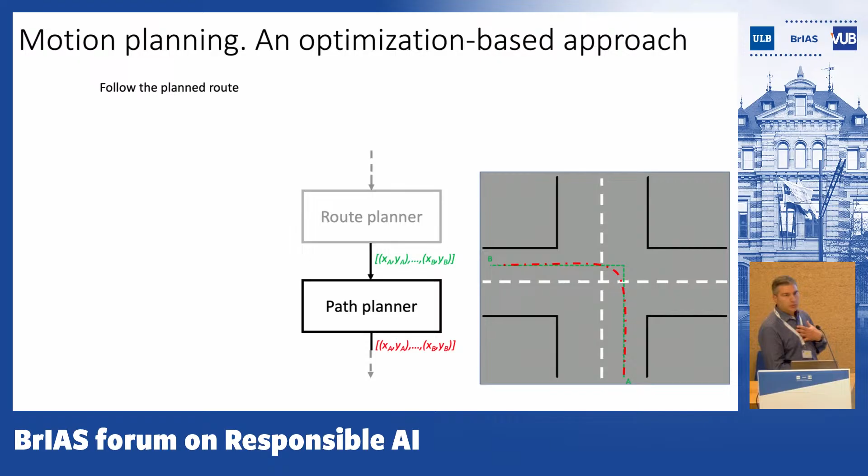That's why you, as a driver, while following the green line, actually plan in advance something like the red line, which is our path. You extract some points from the red line which you try to follow, that account also for what your vehicle is. If your vehicle is a bike, probably you will follow the green line. But if your vehicle is a bus, that would be a tough job. That's why in an autonomous driving stack, you have a module called the Path Planner, that does exactly the job we do every day while driving our vehicles.

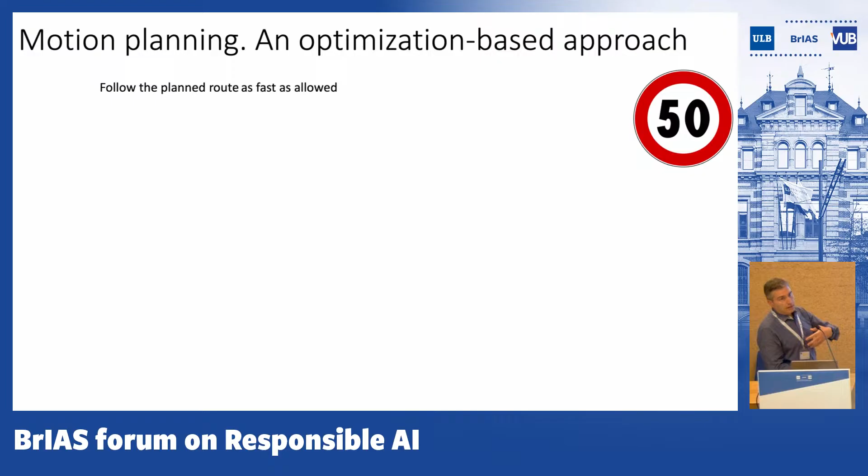Clearly, we as a driver plan our path subject to a number of rules or constraints. We plan a path and follow it subject to vehicle speed, so speed limitation, like the one that you see over here. Clearly, you don't plan anything which your car cannot do. As a driver, we also plan our path subject to what the limitations of the vehicle are.

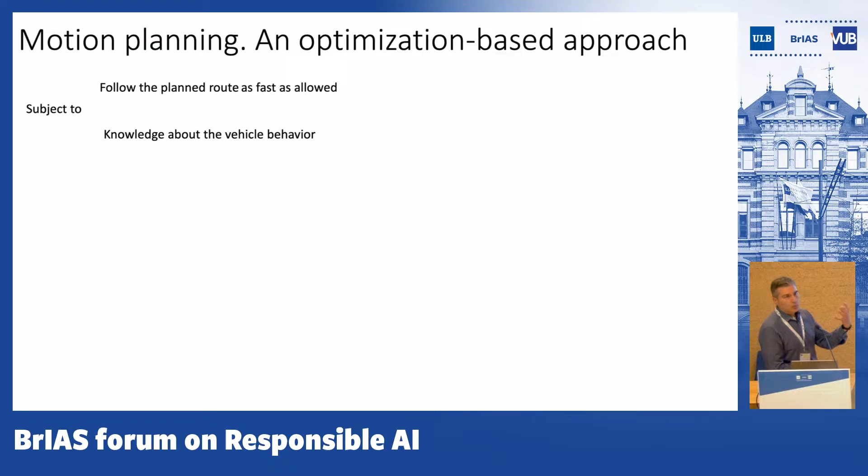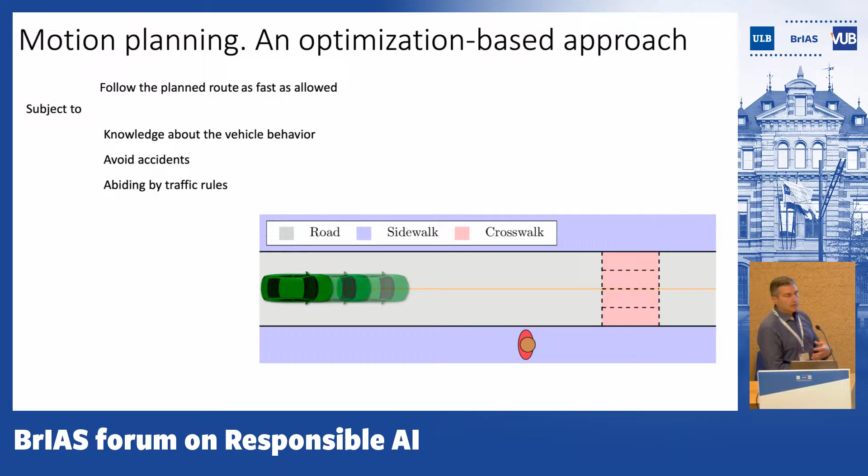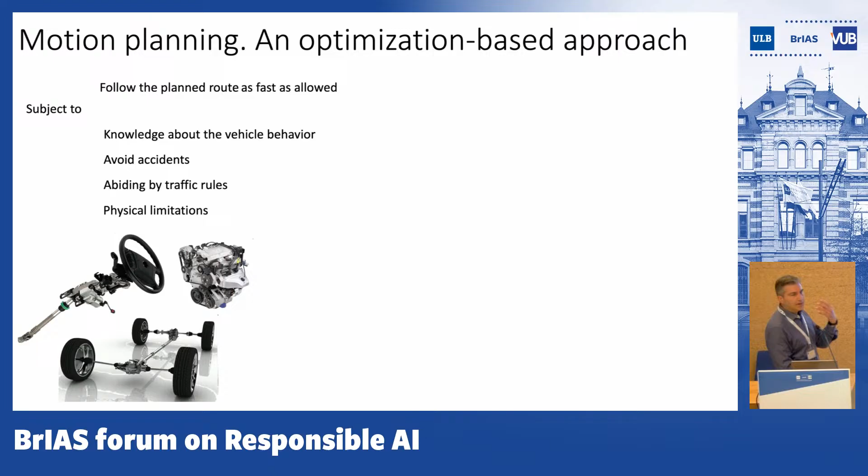Clearly, you want to avoid accidents. So while planning the path of your vehicle, if you see a pedestrian or a static obstacle, you will make sure that you avoid any collision with obstacles. Furthermore, you have limitations coming from the vehicle. Here we have a steering actuator, which is basically an electric motor, and you can't steer as fast as you want. So while planning your path, you should also account for limitations imposed by the physics of your vehicle. The same holds true for engine, braking, or whatever your actuators could be in the vehicle.

So to solve this path planning problem as I just stated it, in our community we resort to a technique called model predictive control. The path, the sequence of points which we plan to follow, are the results of an optimization problem. In this optimization problem, what we try to do is optimize the future behavior of the vehicle with respect to a future sequence of control inputs: steering commands, acceleration commands, braking commands, and so on.

So what we do is have a plan, a trajectory from the current time up to a future time instance. We just use the first portion of this plan and throw away the rest. We wait some time, collect new measurements about the environment and the state of the vehicle, its velocity, its position, and then we redo the same job over and over again.

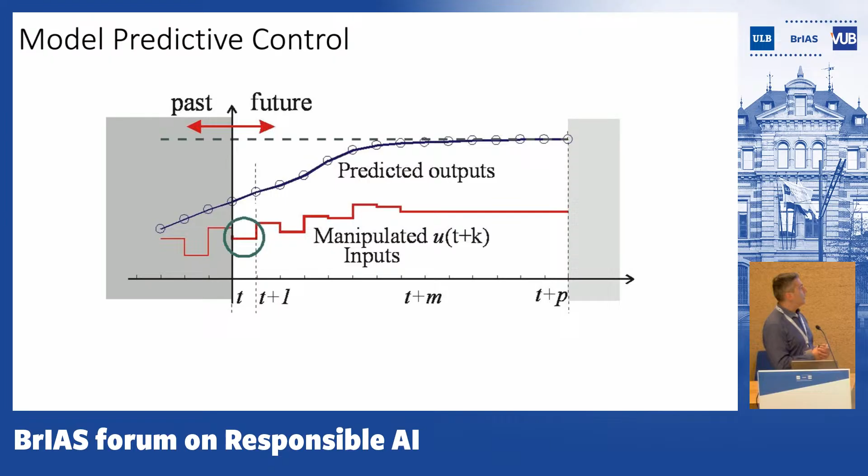This technique is called receding horizon or model predictive control. It's the same scheme, just two different terminologies for it. So let's try to write in math what we have just said.

What we are going to do is try to minimize, at every time instant, a cost function. Such a cost could express the willingness of having a red line as close as possible to the green line, right? So please find a path which follows the desired route, such that I can go from origin to destination.

But our path must also be subject to the limitation of our vehicle. We should account for whether our vehicle is a bicycle, a car, a motorcycle, or a truck, and constrain the generation of our path to the limitations of the vehicle: steering limitation, steering rate limitation, and so on.

And here comes a painful ingredient in this recipe: a number of constraints that model collision avoidance against surrounding objects—other vehicles, pedestrians, bicycles, trash bins, parked cars, everything we would like to avoid a collision with. These are additional constraints I'll come back to later in the presentation.

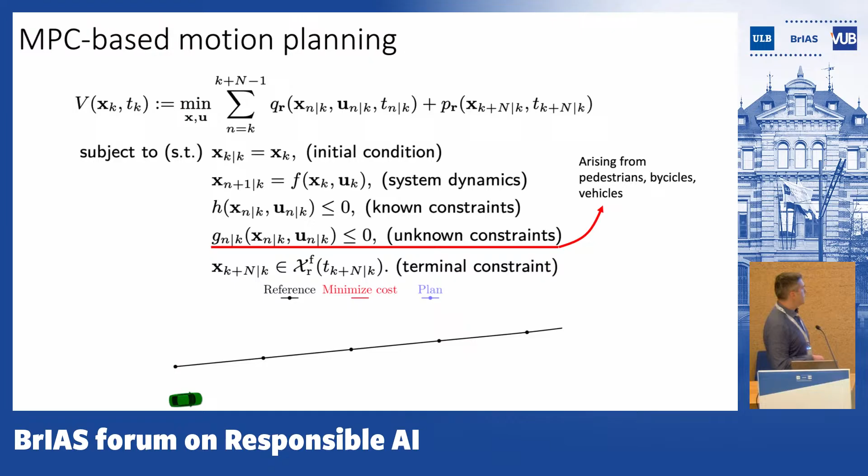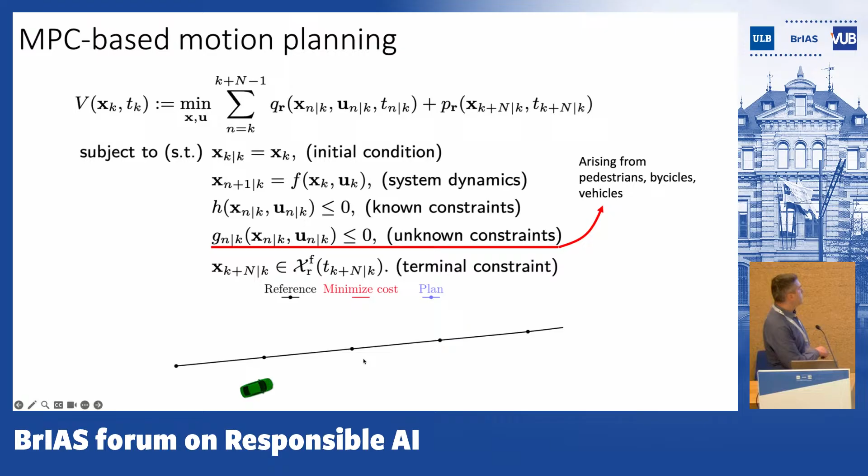The way these algorithms work is that the vehicle, at the current time instant, plans the path such that it will progressively approach this path, the green path we had before. This is the future path that is planned to be followed. But at the next time instant, we redo the same job over and over again.

So it looks like a scheme that perfectly fits the path planning problem we have just stated. But there are several issues to be accounted for. First of all, this is an optimization problem that we need to solve in real time.

What does that mean? It means that every 50, 20 milliseconds, we need to pack such a problem, give it to a software optimization solver, and hopefully get the solution in time, before the 50 milliseconds. But there are a few more issues.

One is stability issues—how to make sure that the path we get nicely and smoothly approaches the planned route. We don't want something that is oscillating or eventually deviating indefinitely from the planned route. That's called stability issues.

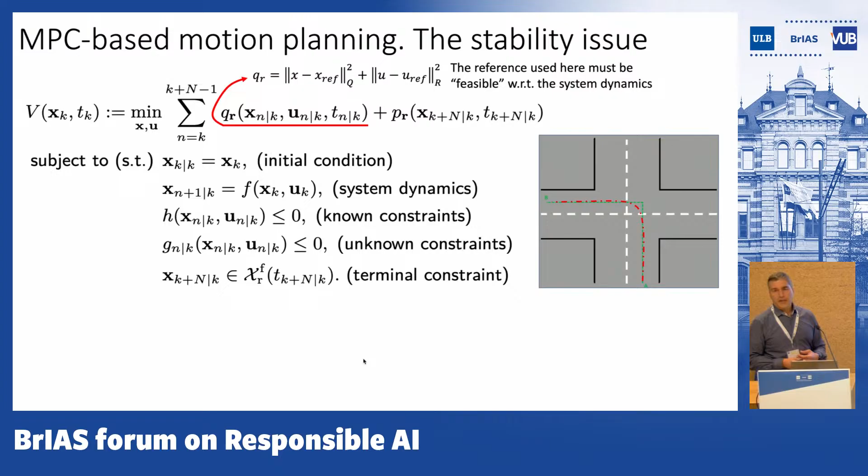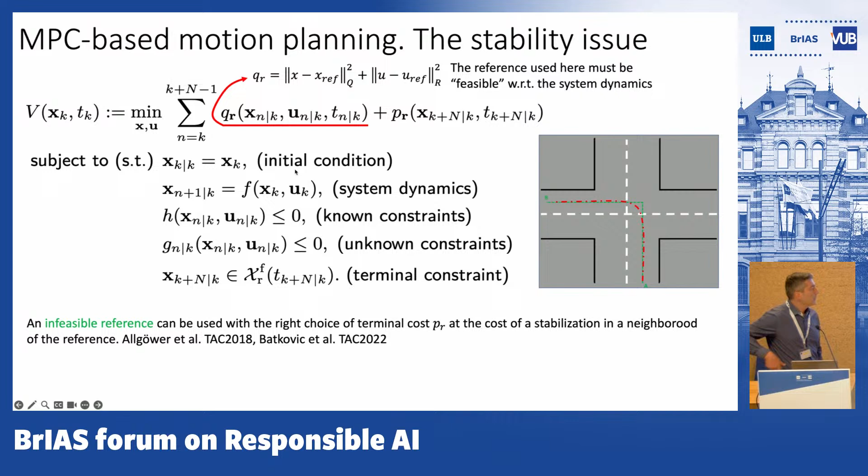There are results which guarantee that you can eventually stabilize around the green line, requiring that you generate this green line such that it satisfies the system dynamics. That's a strong requirement. More recent results from us, and some a bit earlier, allow you to feed in a green line that doesn't satisfy these constraints and still have a stability guarantee. But what we focus on mostly in our work is feasibility issues.

What is the feasibility issue? What we want to make sure of is that we never plan a path such that a crash or accident becomes unavoidable in the future. We want to make sure we always plan a path such that we can still do something in case, for instance, vehicles pop up or pedestrians suddenly cross the road, at least to some extent.

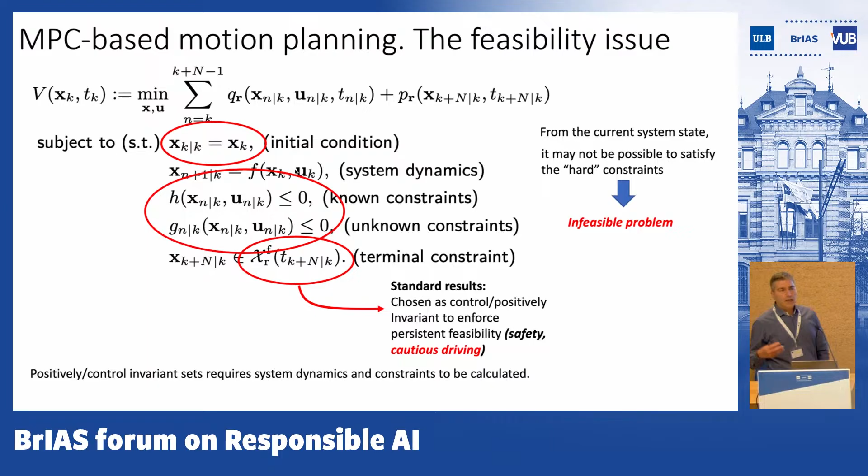There are results which allow you to ensure this, and in particular you can design terminal constraints—constraining the state at the end of the horizon, the position and velocity of the vehicle at the end of the horizon. For instance, if you're planning to approach a wall, you may impose that the velocity at that position is zero, so you avoid smashing into the wall.

That's just an example. What's the problem with these standard results found in the literature? Well, to calculate such a set, you need to know the system dynamics—this function f—no problem.

Most of the time you have it, and it's fairly accurate - a mathematical model of the vehicle. You also need to know this set of constraints, no problem. Most of the time you know what the braking and steering limitations are, fairly accurately. But what you don't know is this constraint.

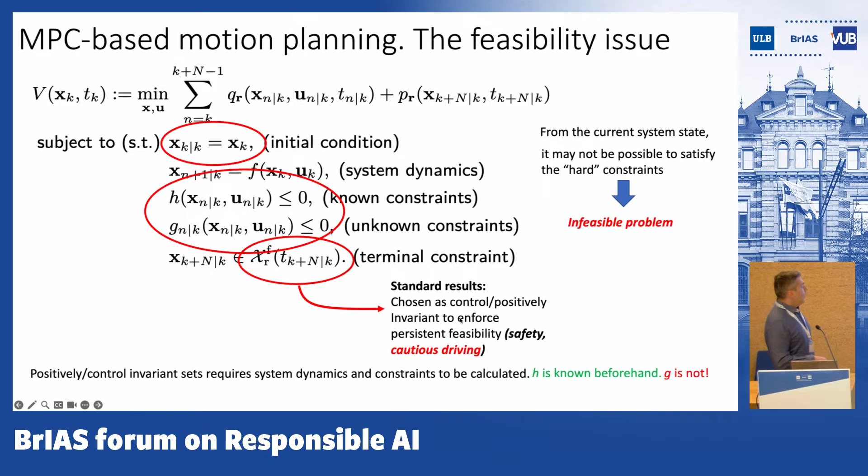These constraints model collision avoidance against obstacles that, when you code your controller, are not there. Nobody is going to tell you that in 50 meters you will have a pedestrian crossing the walk. So that's the problem with these standard results in control theory, and that's what we have been contributing to.

An example of how these unknown collision avoidance constraints could be modeled is given now. You can mathematically model the motion of the vehicle with this set of equations without going into the details. This model describes the evolution of the lateral deviation from a path, for instance from the green path you've seen before, and the orientation error with respect to this path.

Here we can model the steering dynamics using a variable, the steering angle, how much we are turning the wheel at the road - these are the actuator dynamics. This is the longitudinal vehicle velocity, how fast we are going, and this is the vehicle acceleration. Over here we have the commands to the vehicle, the gas pedal and the steering angle. That's it.

Why am I showing this mathematical model? Because standard constraints on the vehicle motion are imposed by constraining these state variables and input variables. For instance, here I may want to constrain the lateral deviation of the vehicle from the green line.

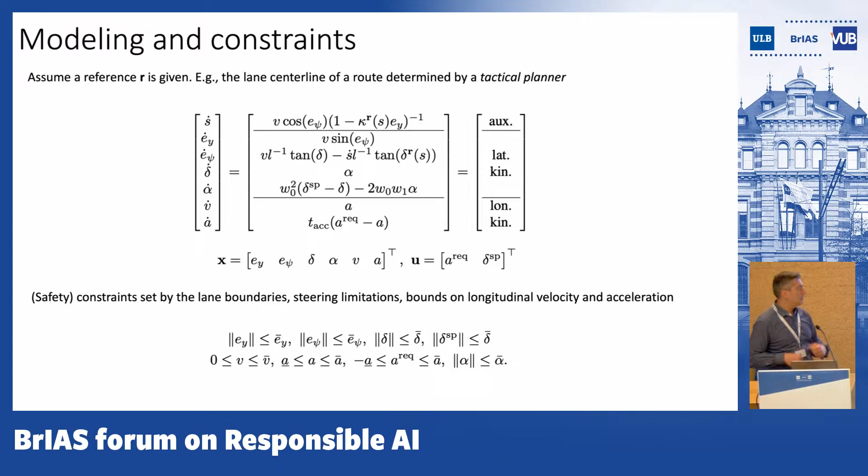Why? Because on the right side it could be a sidewalk with a cycling path, and on the left it could be the other lane. So I don't want to have an accident - stay in the lane, that's basically what this means. I also have other constraints reflecting limitations from the steering actuators, the engine, and the braking capability, and so on.

Let's talk about these collision avoidance constraints, how we can build such a mathematical function, such an inequality. This over here is just an example - you can do it in many ways. This is only one of the different possible ways you can write this inequality.

This could be a collision avoidance constraint saying, for instance, make sure that the minimum distance - here it's written as a maximization, but it could be the minimum distance from a pedestrian is larger than something. This means don't get closer to an obstacle than, say, 3 meters or whatever.

So this function is clearly a function of the vehicle state and input - function of the vehicle position and velocity - but it's also a function of some additional variable that describes where the obstacle is. This W, for instance, could be the relative position of the pedestrian or the other car with respect to the vehicle. And clearly it's uncertain.

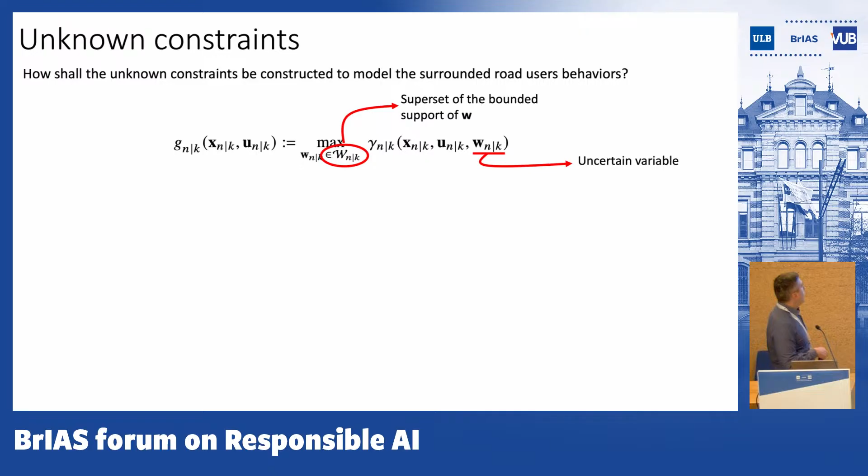It's difficult to model what a human will do, whether it's a driver or a pedestrian. So the approach we have followed is to model the motion of the obstacle we want to avoid as a dynamical system driven by a bounded noise. In the most general setting, you may also want to model the interaction of the pedestrian with the vehicle, which is why we also include the vehicle states and control inputs here.

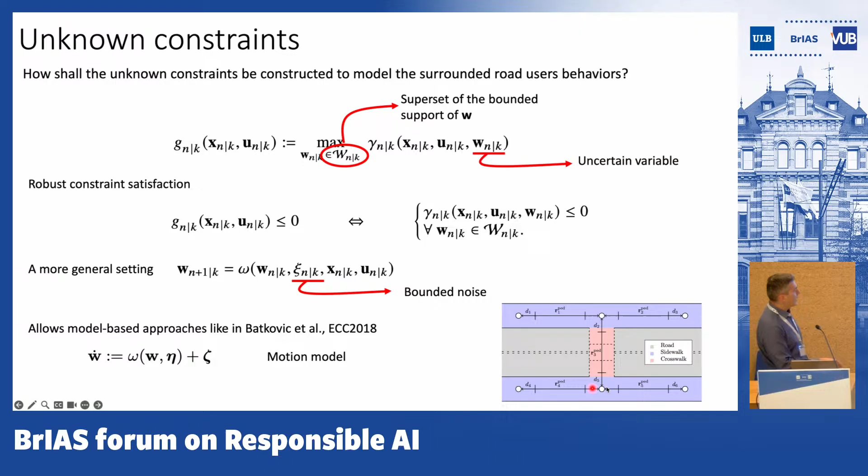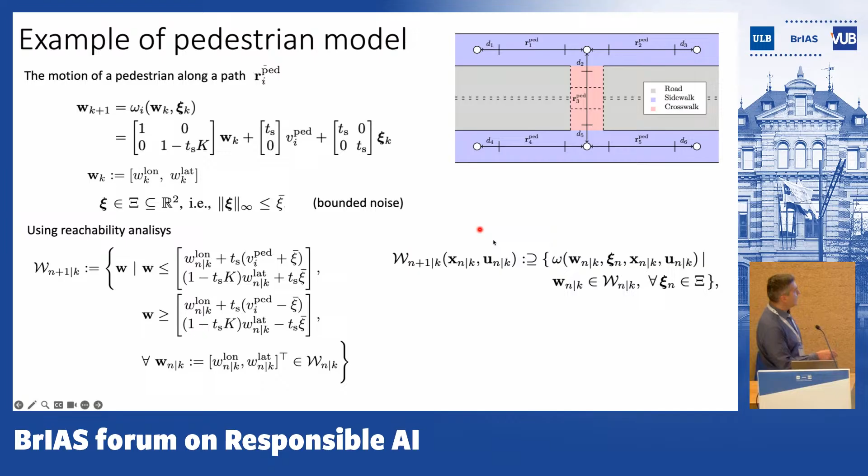An example we have used in one of our publications is to model the pedestrian as an agent that follows this line on a sidewalk or along a crosswalk. To speed things up, as a technicality, we can describe a set of the pedestrian's position at the next time instant, two time instants, three time instants, over the prediction horizon.

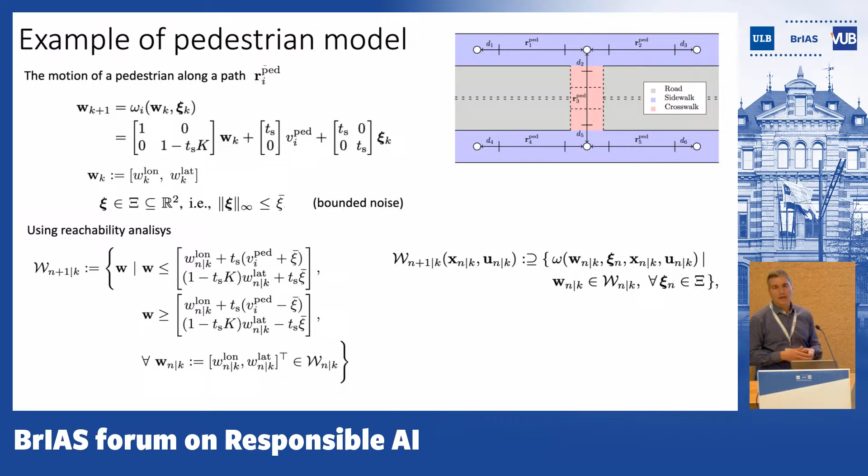So basically, in our optimization-based motion planning, what we are going to have is a set of pedestrian obstacle positions where we are not supposed to be over the prediction horizon. That's the way you actually plan your path. So to make everything work, we need some assumptions, as usual.

The first assumption we use is that there exists a safe set. For example, in a city center, a safe set could be pulling over the car on the right. Clearly such a set wouldn't work in the middle of an intersection—if you suddenly stop there, most likely you'll end up in an accident. In a highway, it could be the same. So we assume such a set exists, but clearly that may not be the case, and in those cases this approach doesn't work.

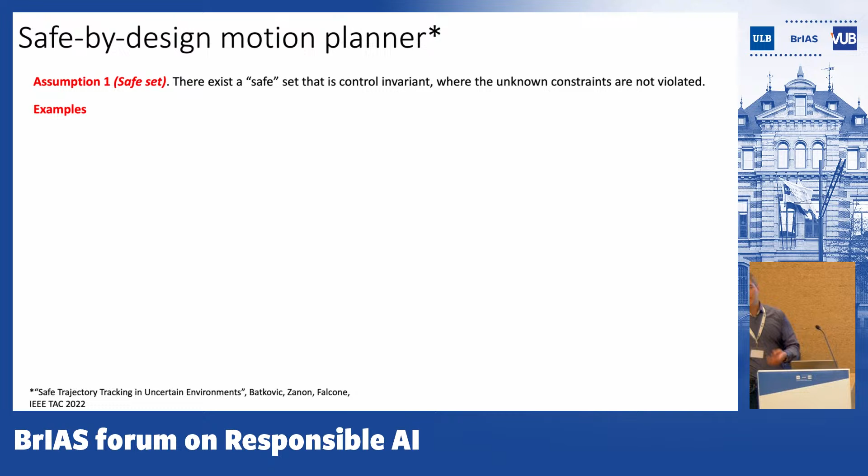There is a second assumption, which might be a little strong but makes a lot of sense in practice. This is called the consistency assumption. Let's make an example of consistent prediction: at time k, the vehicle makes a prediction of where a pedestrian could be at time k plus 1, k plus 2, k plus 3. The red set you see here describes the uncertainty.

Clearly, I know where the pedestrian will be in probability, so I make my decisions and evolve one more step. I'm now at time instant k plus 1. Still, I have to predict where the pedestrian will be at k plus 2, k plus 3, up to k plus n. This time I make my prediction, and this green set is again the uncertainty about this prediction at time k plus 1, with the same meaning for the other green sets.

Consistent prediction is such that the uncertainty at time k plus 1 is less than the uncertainty at time k. That makes sense, right? It's like predicting how the weather will be tomorrow—the closer I get to tomorrow, the less my uncertainty is.

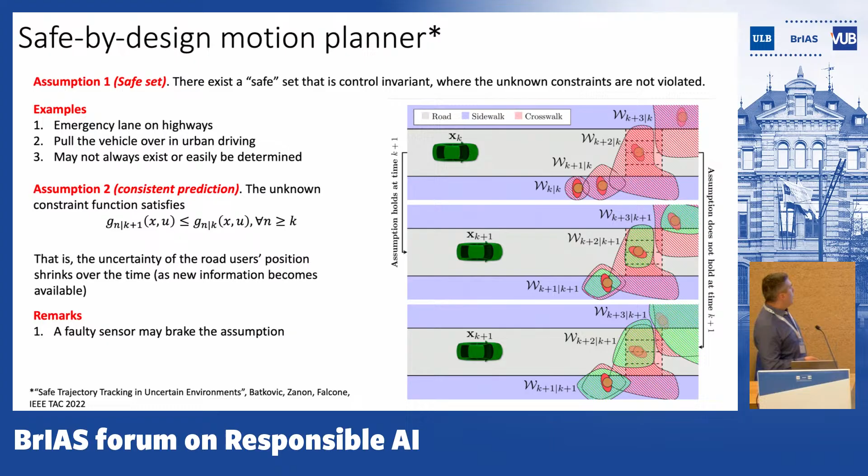Let's see how this all works. This is a simulation of a vehicle negotiating an intersection with a pedestrian. Here we have a pedestrian, a crosswalk, and our vehicle. We formulate our motion planning problem as described before, completely disregarding whether the predictions we made are consistent or not.

Let's see what happens. Here you have two different colors—this is the onboard sensor field. We can detect the pedestrian over here, but we cannot detect the pedestrian over here. So here there are no constraints, and we can go freely. But then suddenly a pedestrian appears here, and we have this surprise—suddenly we are not allowed to get into that set anymore. That's basically a case where the consistency assumption is broken. As a consequence, the vehicle doesn't manage to stop in time, and there is a collision.

You can see from the lateral error, the orientation error, and the steering that the planner is trying to do something desperate—braking, but also steering. But the collision is unavoidable. Here is the acceleration; this blue line shows the vehicle making a full stop, an emergency braking maneuver. No way—we have killed the pedestrian.

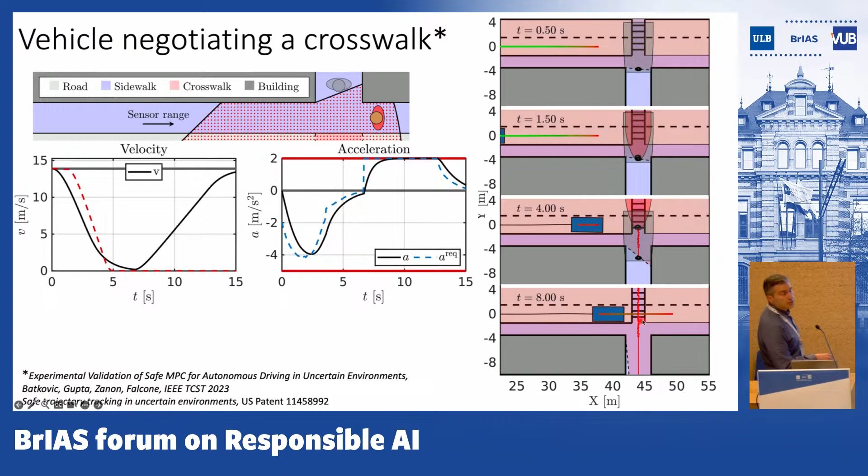So over here, you see that we have a kind of ghost pedestrian, but we are slowing down because we propagate this set, so in this set we are not allowed to be. This might not be the case at all, never. The pedestrian may not show up over there, but suddenly a pedestrian shows up. This is the predicted position, and you see here consistency applies, consistency holds. So in this case, we have all the time to slow down and brake in time to avoid a collision. We are introducing a little bit of cautiousness in our planner to make sure that we can handle unexpected situations.

We have done tests with multiple pedestrians, so we have a pedestrian over here and a pedestrian over here. We can handle this type of situation. This is a replay of an experiment that we have done. In this case, we apply the same technique to avoid collision with this pedestrian and with this pedestrian.

Over here you see the lateral error, so the deviation from the green line, the orientation error, the steering angle that we command, and this is the velocity. So we speed up, then we slow down to make our left turn, and at some point we stop to let this pedestrian cross. But then we speed up again, and we see that no collision is possible with this pedestrian, and then we go. That's what you will see in the following animation, and then with the experiments.

Here's an important piece of information: how expensive is our approach in terms of computational complexity? This plot shows that the maximum time it takes to solve our optimization problem was 40 milliseconds, well below the 50 milliseconds, which is typical for this type of application.

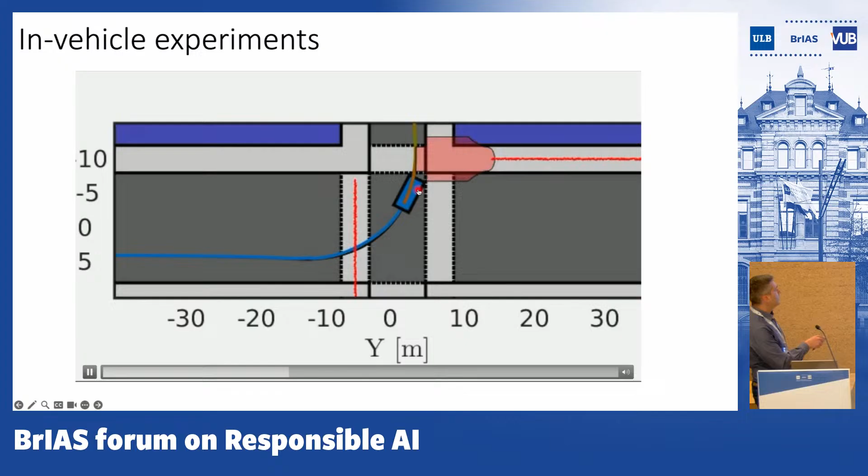So this is a replay of experimental data. Now you see the animation corresponding to the previous simulation results. This is the prediction of the vehicle, this is the actual vehicle. We planned that we should stop over here. The pedestrian has crossed, and then here we understand that actually we can do the job by left turning even before the pedestrian comes, and we do.

This is Ivo. Now he's working at ZenseAct and is basically performing this test. Here we used a simulated pedestrian, we didn't have permission to do tests with human pedestrians, as you can imagine.

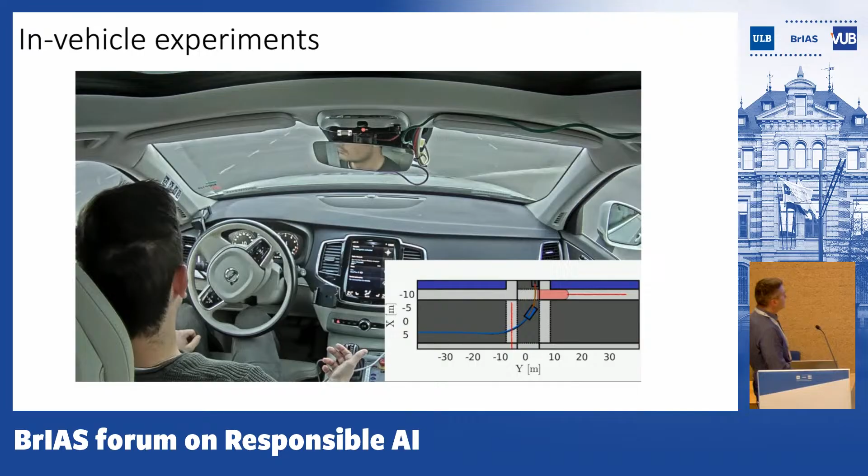We have improved this approach. Why? Because, as I said, the consistency requirement could be a little bit strict, a little bit stringent, overly conservative. So Yin Shuai is a postdoc at Chalmers, working on a project together with Ericsson, where we are trying to collect information from communication cells to learn and then predict the behavior of humans in traffic. What she has done here is to assume that for some reason the consistency assumption is broken.

So what does it mean? It means that the inequality which I showed you before also has some positive term. Recall that this should be negative, minus g is a positive quantity, so this stuff is a positive quantity over here. It can be shown that even in presence of bounded inconsistency assumption, what you can do is solve an extra optimization step, an additional optimization problem that tells you how much you should relax some constraints, for instance on steering rate or braking rate, in order to cope with such inconsistent prediction.

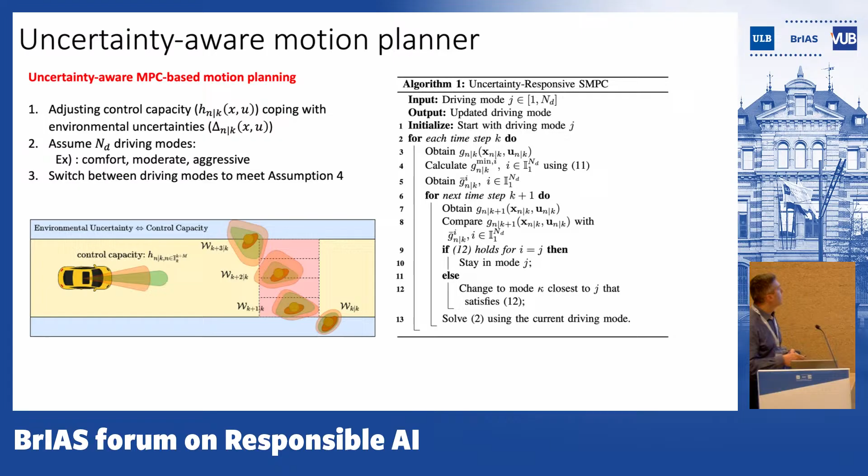So here is the data that is publicly available from ZOD, the ZenseAct Open Dataset. It's very similar to, for those of you familiar with it, WayMax, the dataset released by Waymo.

nuPlan, which is the dataset released by... okay, it will come. So what you see over here is that this vehicle is suddenly, yeah, that's what it's doing, okay.

So normally with the controller that we are using, we couldn't cope with such a cut-in and keep a safe distance. We recognize that we cannot. Then what we do is switch to a controller with different bounds such that the collision with this vehicle is guaranteed to not happen.

So those are the results that you see over here. You see that the vehicle is braking as much as is allowed, which I think is 3 meters per second squared.

But then at some point, this plot here shows the inconsistency of our prediction. So at some point, we detect that this vehicle overtaking on the left is moving suddenly to the right, so it's cutting our path.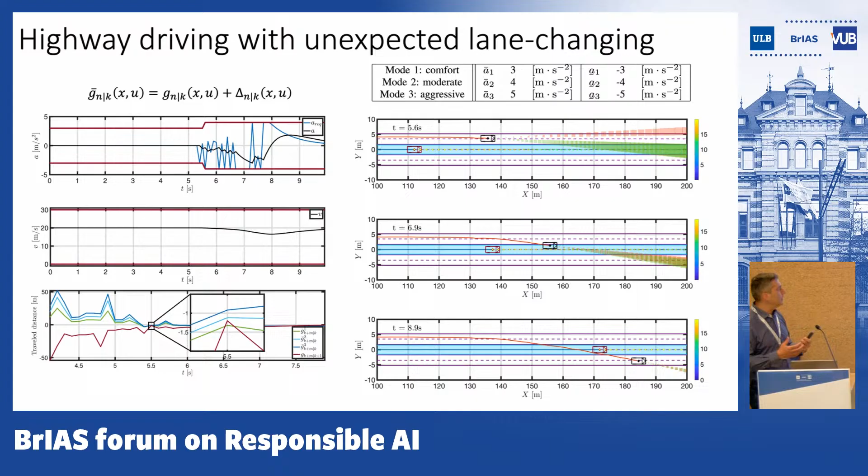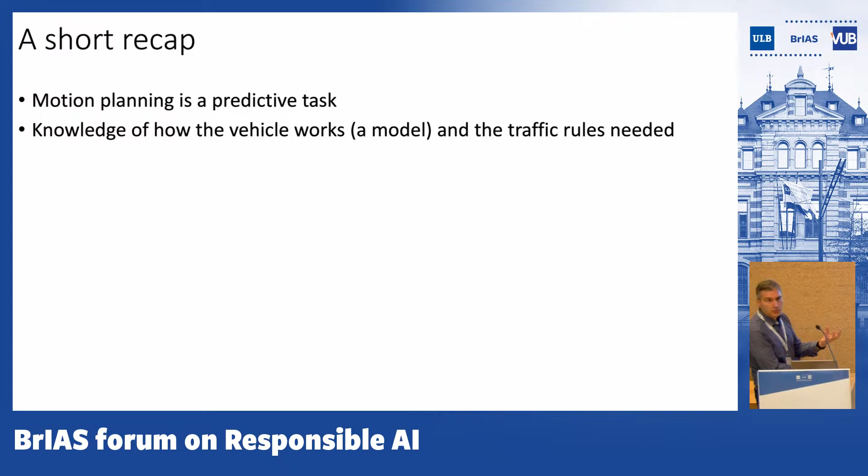So far we have been talking about motion planning mostly in urban environments, and you have seen that the prediction, the way we predict the behavior of surrounding road users, plays a central role. You also have to modify how you solve your motion planning problem to cope with the uncertainty connected to the prediction of surrounding road users.

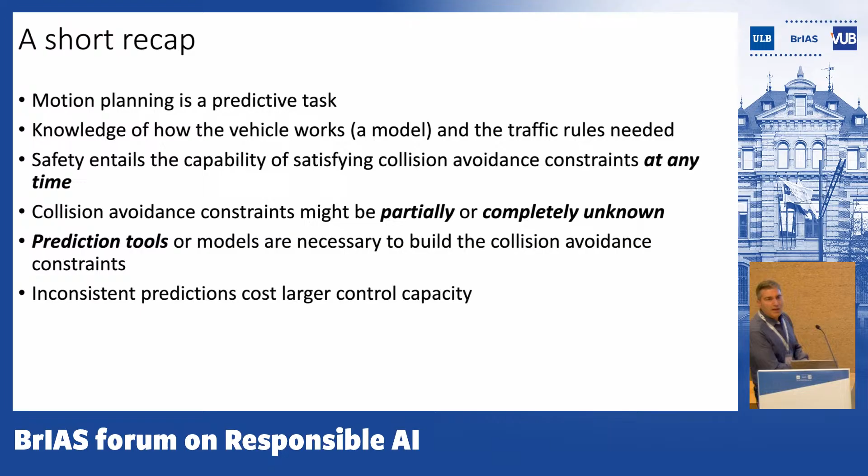Now, at some point, what I was planning was to talk about how to make predictions of surrounding road users. But I will skip this part, because yesterday I got some slides from my student, who has been part of the team of the Unimore Racing autonomous racing team.

There are 2 competitions. One is called Indy Autonomous Challenge, done in the US. Another is called A2RL, done in Abu Dhabi. This student has been in charge of designing the motion planning for autonomous racing.

Yesterday he sent me some nice results. I thought it would be more interesting and exciting to talk about results, that's why I will skip this part. For those of you interested, I can share the slides and also the papers, and jump to this.

Okay, so that's what we are going to talk about. The PhD student I told you about is Francesco Prignoli. He's visiting Francesco Borrelli at UC Berkeley, my former PhD supervisor, and he got some help from local PhD students too. So it's a joint work.

Okay, so what we've been focusing on is the following. In racing applications, when it comes to overtaking, you have right-of-way rules, which are extremely important. If the defender does not respect this right-of-way rule, he gets penalties. Also in Formula 1, it's like that, right?

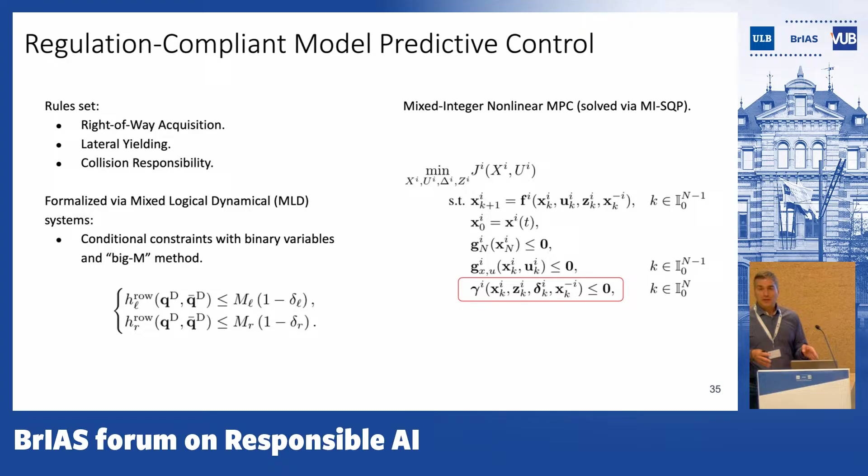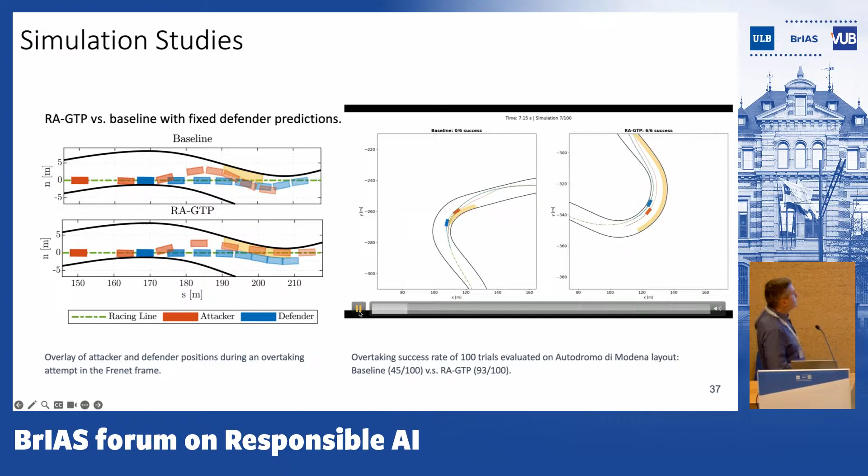So the yellow stripe is basically the space that the defender is supposed to leave according to the right-of-way rule. On the left, you see that space is not left. On the right, it is. We have aborted all 18 of 23 possibilities to overtake that we had, while here we are at 22 out of 23. Only once did we have to abort.

It will go over and over again, and the outcome is that we succeeded in 93 out of 100 trials, while the baseline only successfully makes 45 overtakes out of 100 possibilities, 100 corners.

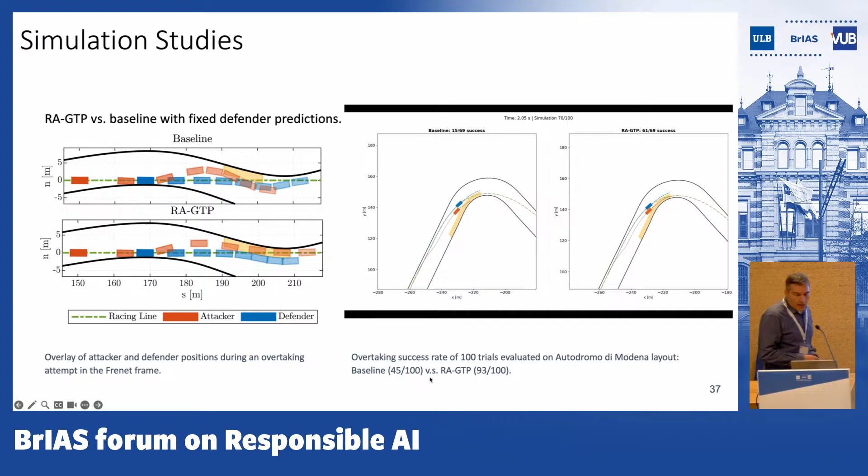Okay. So I would close here my presentation.

Most of the stuff you have seen has been funded by WASP, which is a research program in Sweden that stands for the Wallenberg Autonomous Systems Program. Wallenberg is a rich family in Sweden, funding this nice program since 2015. It's also partially funded by Vinnova, the innovation agency in Sweden, funding applied research together with companies, in this case Zenseact and Ericsson. Also some of the stuff you've seen has been funded by the Swedish Research Council.

And yeah, those are the people I've been working with in the project that you have just seen.

Do I have more time? If you want, yeah, how much, because I have changed my plans. We have never stopped people historically, so if you have something interesting to show. Yeah, I will be super fast.

Just to give you a taste of what we've been doing when it comes to prediction. This is the part which I skipped to present this newer material that I received last night.

Okay, so we are also working on the problem of how to make predictions, how to predict the behavior of humans in traffic. It can be highway traffic, it can be urban traffic. How is this done typically nowadays? With neural networks, of course. But what's the problem with neural networks? Well, the prediction of how the traffic around us is going to behave, as you have seen, will end up in our optimization problem, right?

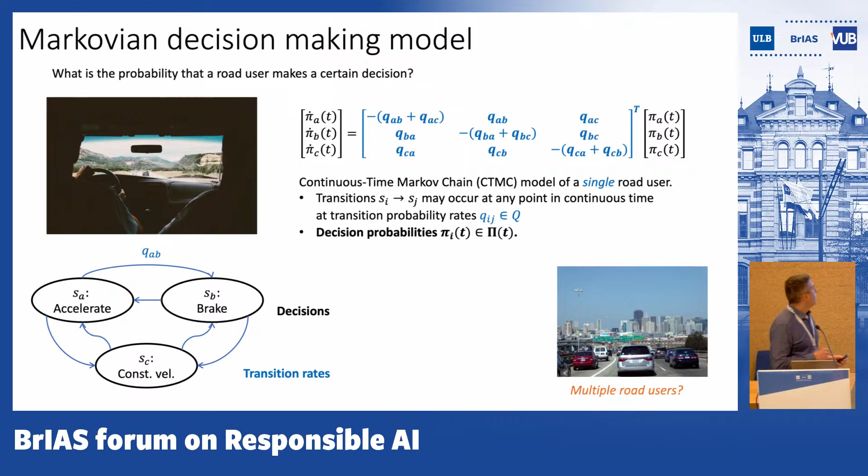In principle, there are tools out there to identify and calibrate those matrices from experimental data, but that's actually what we are working on. So we are using data from simulators to calibrate these matrices, to be able to use these model structures in our optimization-based motion planning algorithms, which we have seen before. That's what we are doing on the prediction of road users' behavior.

So I will stop here. I also have some additional slides on this topic in case some of you are interested, but I will stop here to be more concise. Thank you.

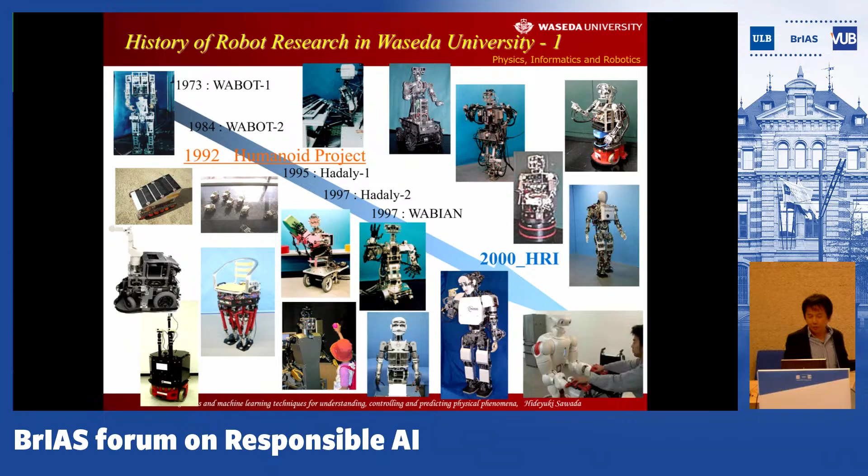Yes, this is the first robot, maybe like this one, from 50 years ago. The first robot we developed 50 years ago is the static walking robot.

It means that in each small motion, the stability is calculated, so in any situation the robot's stability was kept under control. But this kind of static state walking is different from human walking, because we walk dynamically, right? So we cannot stop midway through the motion, or you fall down. But firstly, the first robot achieved static motion one step at a time.

At that time, the robot took about 30 seconds for one step, because we needed calculation one by one. The first robot used a hydraulic system, not an electric motor, because at that time there was no such motor.

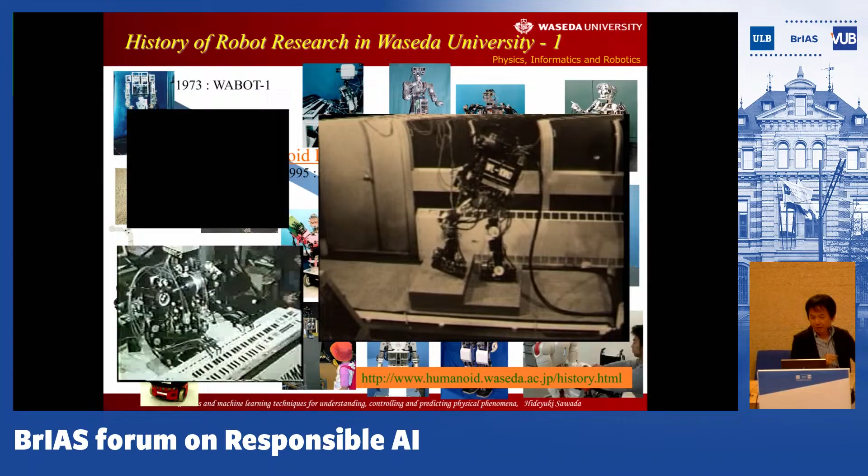The second robot, developed 10 years after that, realized dynamic walking, just introduced here. Like this one, dynamic motion, walking motion like a human, and it can also climb steps and slopes a little, more than 40 years ago.

After that, we developed a piano-playing robot using DC motors, maybe 30 or more DC motors for controlling the fingers and feet to play the keyboard. At the Tsukuba Expo in 1985, this robot played together with a real orchestra.

Maybe we are like this one. It was really a sensational achievement, realized by robot 40 years ago. Yes, this is an old video, but this is the history.

Then in 2000, we started another robotic research institute called the Future Robotics Organization, and we developed further robots, not only to walk or move, but to handle objects and to make collaboration and communication, including touch, with humans.

This is a video of a robot developed about 10 years ago, around 2010, and it can dexterously manipulate small items. It's not a chopstick, but a straw, and it can handle it to put it in a cup and give it to another person.

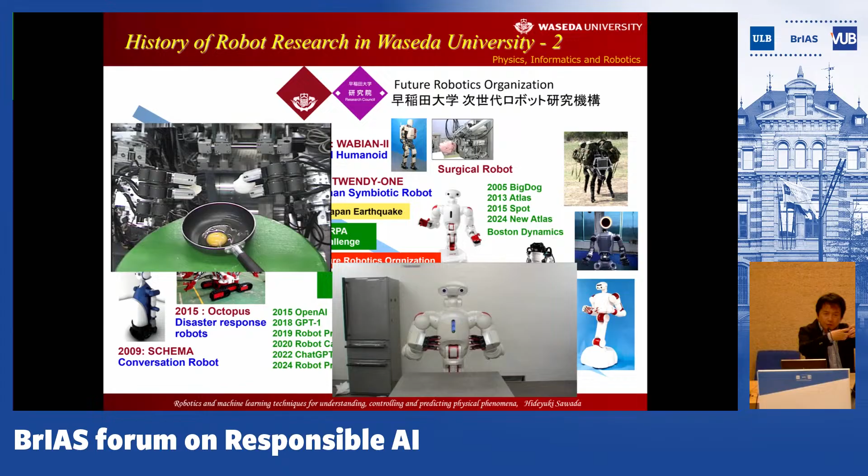By controlling the force given to the eggs, it can softly grasp the egg, and also it gives some force to break it on a pan. Okay, right? And yes, this is the walking robot.

As you know, these days there are different kinds of robots introduced by the U.S., Japan, and also China. But as I introduced, the first biped robot was developed by Waseda University, and these days different kinds of robots are developed. But we, the Waseda group, do not work on biped robots anymore, because this is a typical structure of the biped robot.

The biped robot is expressed by the physical control model of an inverted pendulum, right? Then all the motors are settled in the inverted pendulum, but it is much more complex, though it can be modeled like this. Then by modeling all the models and the geometrical structures of the robot, we can construct a control system. Then once we get a control model, it is not difficult to control it.

What the problem is these days is the power of the motor to generate power. Have you ever thought of how much force is given when you walk? For example, for a 60 kilogram person, when you walk, how much force is applied, for example, to a knee? Have you considered that? About 4 to 5 times your weight.

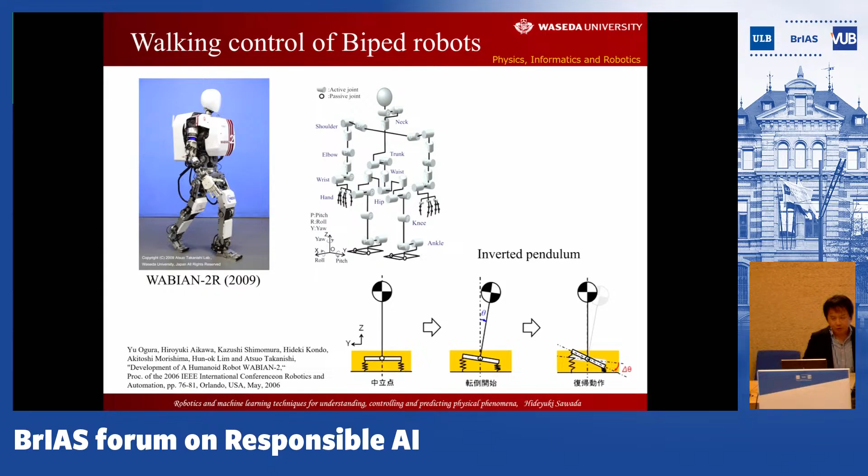Waseda University has been engaged in the development of such robots so far, and these days we are much more interested in further flexible robots able to have good communication with humans, for supporting or having interaction in real time with a human, like handing some object to a person, or working together, or something more.

As you know, robots were first introduced for manufacturing in factories, in the secondary sector of industries. Then such robotic technologies were introduced to the primary sector of industries, such as agricultural robots, or agricultural worker-supporting robots, and something more. And also, these days, such robots have been further developed in the tertiary sector of industries as service robots, to support humans or to assist humans, and something more.

And this is another result introduced by the graduates of Waseda University. It is a project called Gundam Global Challenge. Gundam is a very famous robot, first animated in Japan in the 1970s, almost 50 years ago. All Japanese people know it.

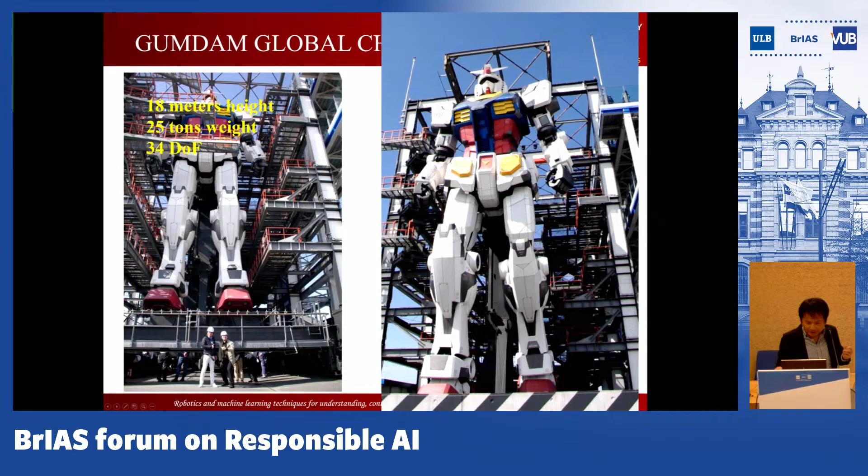motors to generate such a great amount of force, right? So we did something to realize it. Okay, yeah, this is a robot, and it's me. And he's a doctoral student in my laboratory, and this is the size of the robot, and you see the robot moves like this.

Yeah, this is a demonstration of the motion of the robot. It moves very slowly because each motor has a great amount of gears to amplify the generated power into the outputs, right? So the gears make the motion slower in proportion to the gear ratio. So the motion is very slow, but it moves.

Even the hand part, the robot is raising his arm like this. But the weight of the arm itself is several hundred kilograms. So this means, and also it is just the weight. But if you make the arm go up, then the motor of this part works. It means that the force to be given from this motor has to be calculated with a moment, right?

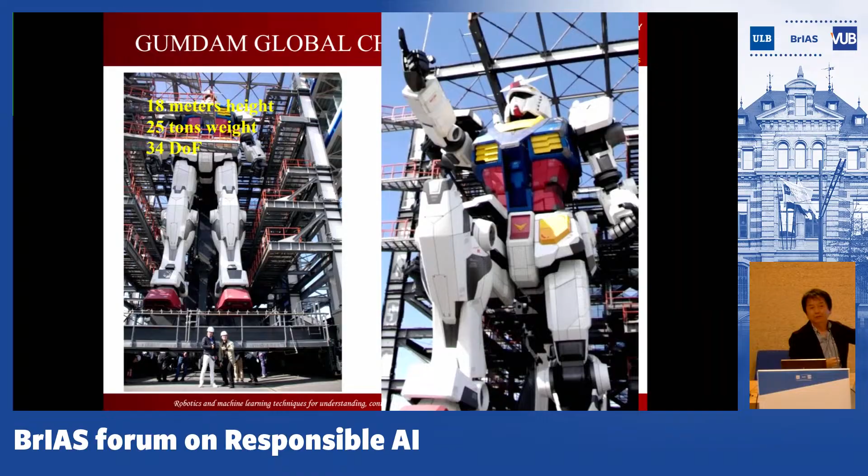Proportional to the distance, right? So the force should not be only the weight, but also the torque. So it's several times the several hundred kilograms. So like this, yes, pretty heavy arm to be going up like this, but it works, right?

And the Gundam has been exhibited in Yokohama, next to Tokyo, from April 2021 until March 2024, just until one year ago. Then in March of 2024, we disassembled it.

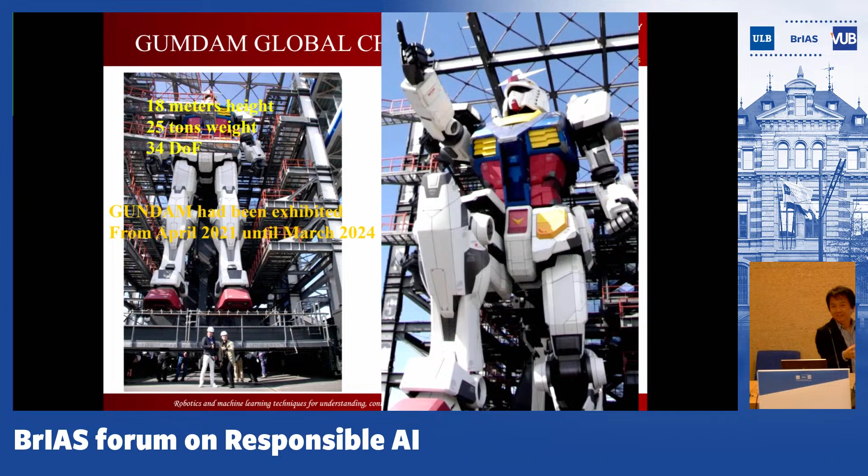Then what happened? They were sent to Osaka Expo. Okay, here. And currently, this robot is exhibited, not moving, but it is exhibited like this, in a still pose, in Osaka Expo. So if you go there, you can see the Gundam, the real size Gundam, 18 meters height, but it won't move anymore. Yeah, like this.

In a pavilion, they exhibit the Gundam. And then in the pavilion they present some metaverse exhibition, so that you can observe the Gundam only in 3D or something in this pavilion. Yeah, and outside they exhibit this Gundam.

Okay, yeah, currently until maybe September of this year. I don't know, maybe 3-4 months from April, this month. No, last month. Yeah, okay. Then, so far in Waseda University, different types of robots have been introduced so far.

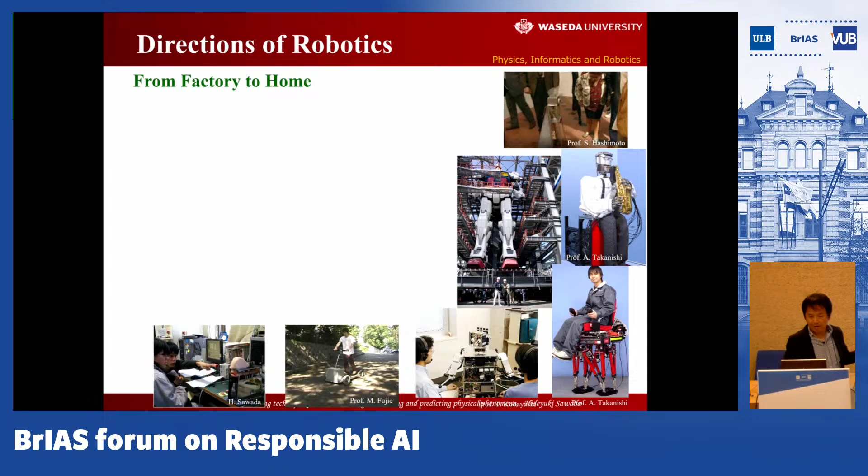And we have realized that the robot in factory can be sent out to home for open public, so that it can work with humans in a human living environment. And then such a robot cannot be specialized with great power or fast motion or something more.

They are not. They will not exist for fast production, mass production, or very precise motion or something more. Instead, the robot should behave like a human, because we humans do not move so precisely, so fast. But to work or to live with humans, the robot should be like a human, right?

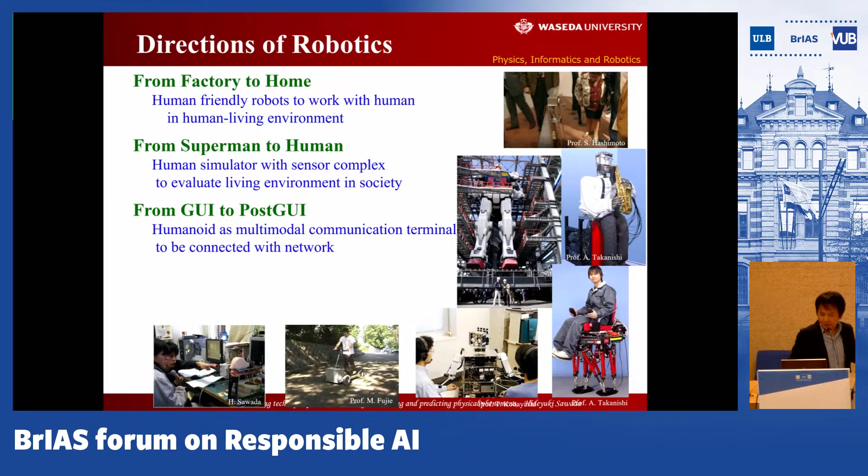And so to do so, one approach to be installed in robots is machine learning or AI, so that the robot is able to learn communication skills through learning with humans. And also the robot can learn the living environment like a human baby does, right?

Human babies are born without knowing anything. But by making interactions with his or her caregivers, I mean the parents, they get to understand the living environment, the world, and also communication skills to handle the surroundings. So we expect robots to behave like humans, right?

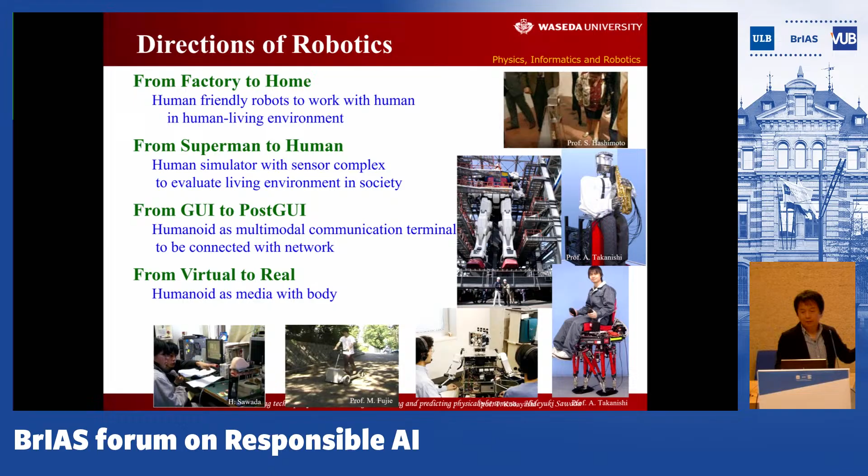It is human-like intelligence realized by computers, and it was first introduced about 80 years ago as a neural model. Then AI or artificial intelligence was first invented or defined in a Dartmouth workshop in 1956. And then after the introduction of the perceptron, the ability of machine learning greatly increased.

And Professor Oteru is my supervisor from my college studies, and he already passed away. And I started the research of AI from the mid 1980s. Yeah.

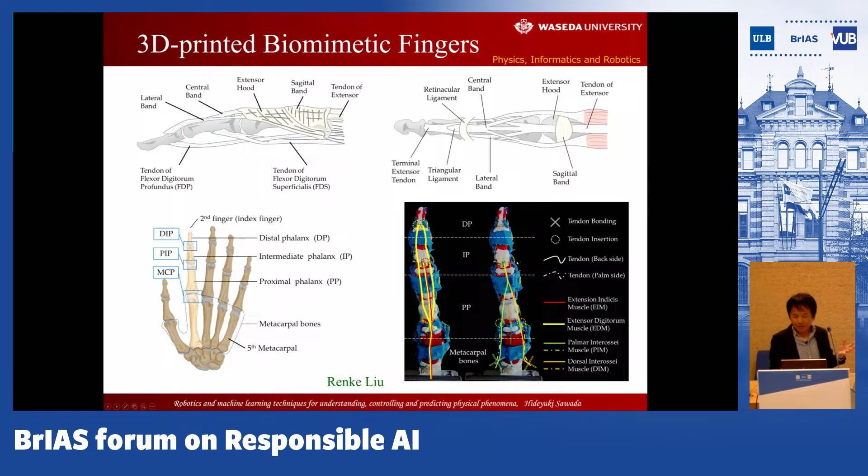One example is the 3D printed biomimetic fingers. You see, we are printing each part of human-like fingers by referring to the 3D model of a real finger that consists of ligaments, bones, tendons, muscles, and so on. These days we can print different materials at once, so we print them to make a finger. Then this articulation with an artificial muscle moves like a human, very flexibly, like this.

What is the difference between rigid machines and soft machines? When you make rigid machines with the geometry of a machine structure, you have a rigid bar and rotating motors, so the path can be calculated mathematically and geometrically with a rigid robot. But in the case of a soft robot, like our hand, our joint is not rigid—we can move very flexibly with one joint. This means that when we locate the hand here, the location of the elbow or shoulder can be defined or placed differently. In the case of a rigid robot, this won't happen—every motion or moving path can be geometrically calculated. But in the case of the soft robot, it is not like that.

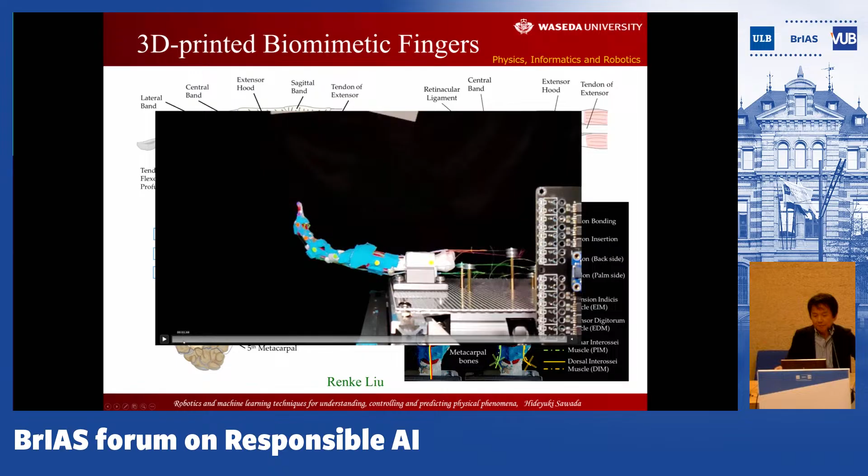So the idea for controlling soft tissue is to use machine learning. The motion of the finger is realized by artificial muscle, but the control is made by machine learning. We also have different topics like tactile displays or waterborne actuators to move in water, and many others in my laboratory. I have different topics, including one that replicates the motion of an insect.

Insect. Yes, and also we are developing a fish robot. This is a robot made of a very soft fin, and it swims like that. And also we are working with an inchworm robot to flexibly move, to walk like this.

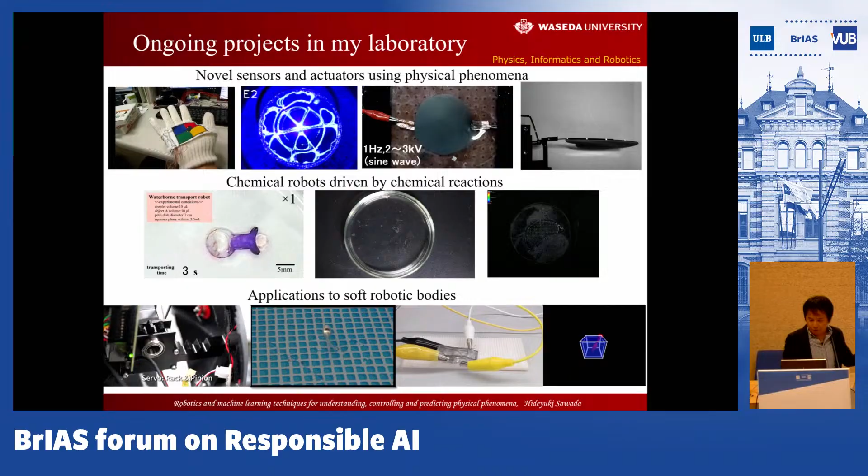I briefly introduce some of the control of such robot. The first one is a talking robot that speaks like a human. Mostly you can listen to a human-like voice from your mobile phones or TVs, but all such voices are made by software methods using computer algorithms. But what we are trying to do is to reproduce it all mechanically, like a human vocal system.

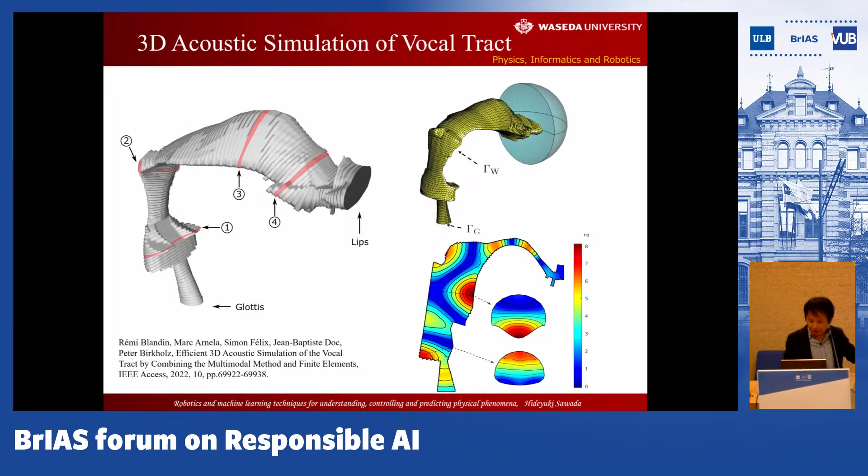What we do is let the robot listen to its own voice and also a real human voice for reference, and make an autonomous control of the motion inside the mouth to make the sound close to a real human voice.

It refers to the procedure that a human baby learns its voice. Human babies learn clear vocalization through training with their caregivers or parents. Firstly, the babies only cry, but gradually they learn how to make sounds. The babies cannot see inside their mouth, but for articulation, the baby has to move the inner mouth. They do this not by observing the inner mouth shape, but only by listening, then make a trial to produce close sounds by adaptively moving their mouth.

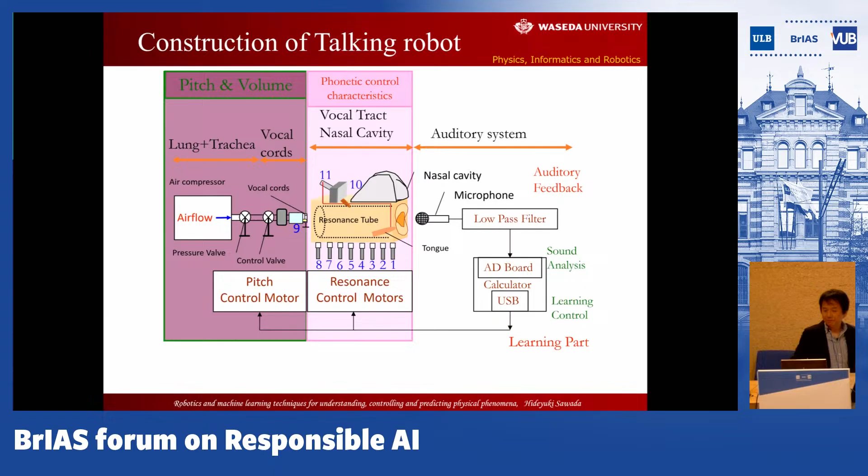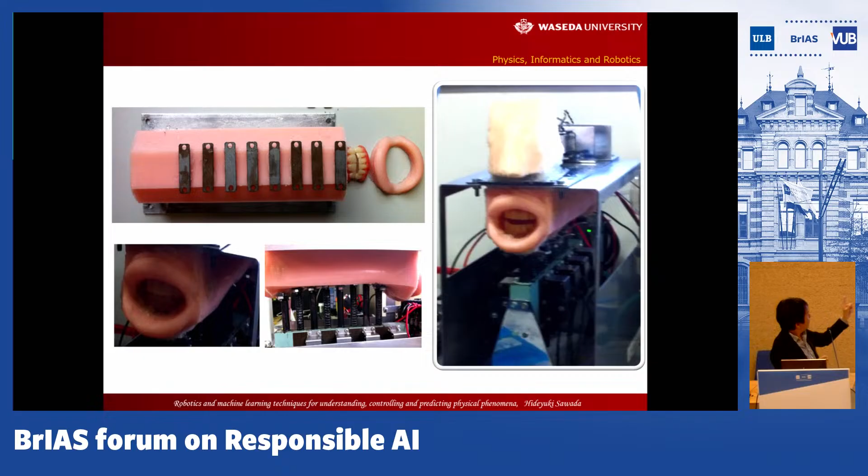This is what this robot is doing. Everything is made all mechanically. We use a silicone rubber mouth and tongue, the teeth, and the nasal cavity made with plaster, and then the motors are set underneath this tube.

The size is the same as the human vocal tract, with a length of 18 centimeters, because if you have a different length or diameter of the mouth, the resonance characteristics would be different from a real human. So we made it the same or close to a real human, with a length of 18 centimeters and a diameter of around 35 millimeters.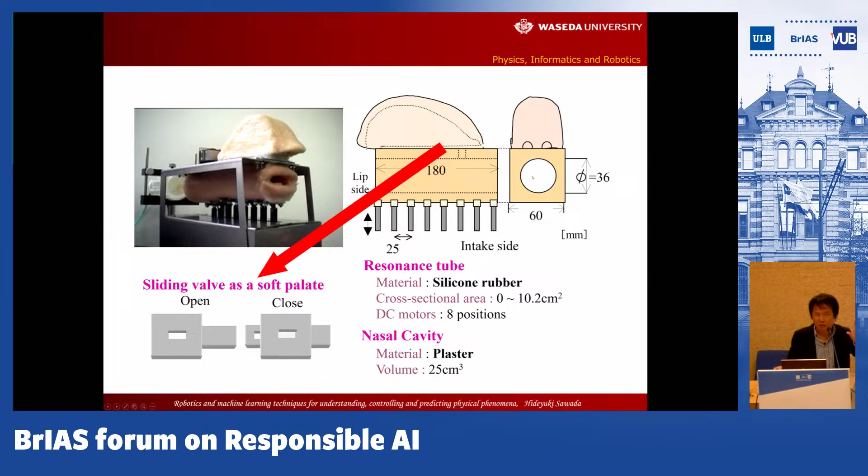As you see, this robot is able to make different resonance characteristics by randomly moving the vocal tract, and this is the vocal cords making a vibration with the air.

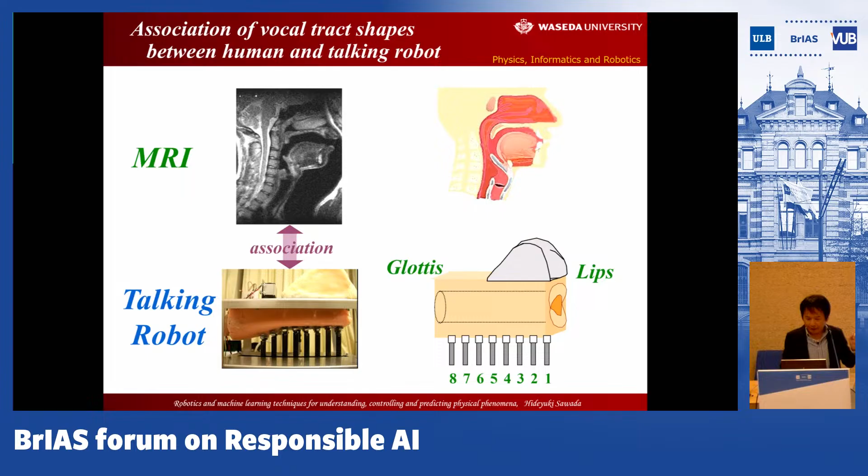For the learning, we use a self-organizing neural network, so that the input vector, given by the acoustic feature of the vocal sound, has an output set as the articulation of the motors. So this network learns how to control the motors to be associated with the input vocal features, the vocal sounds.

Then the learning has been conducted, and as a result, the robot successfully learns to vocalize, like this. Here, firstly, the robot learns the pitch, the different pitches. After the learning of the pitch, then it starts.

It sings a Japanese folk song.

Maybe you don't know this song, but all Japanese people know it and they recognize this singing. It looks stupid, but this was the first system that realized autonomous learning of a human vocal system, all mechanically with feedback control, and the first with all soft tissues, not a hard one.

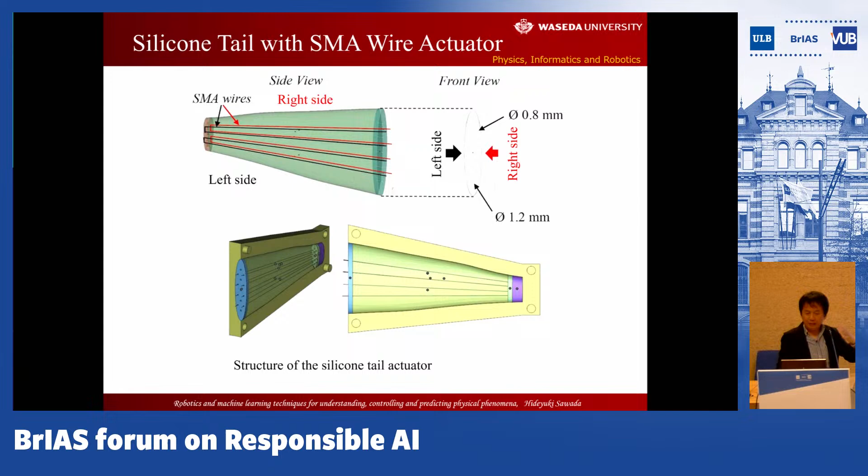The next topic is, briefly, the robotic fish. We have developed a very soft robotic fish with a soft fin like this. But the problem was that the soft fin is not controllable, especially in water.

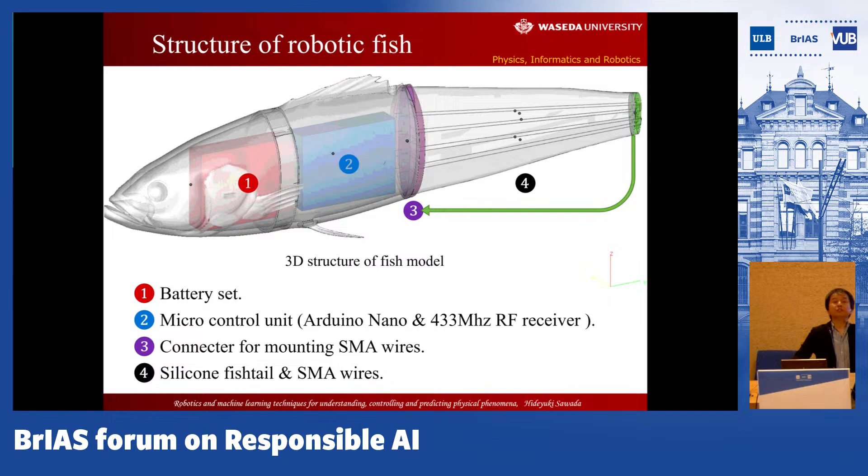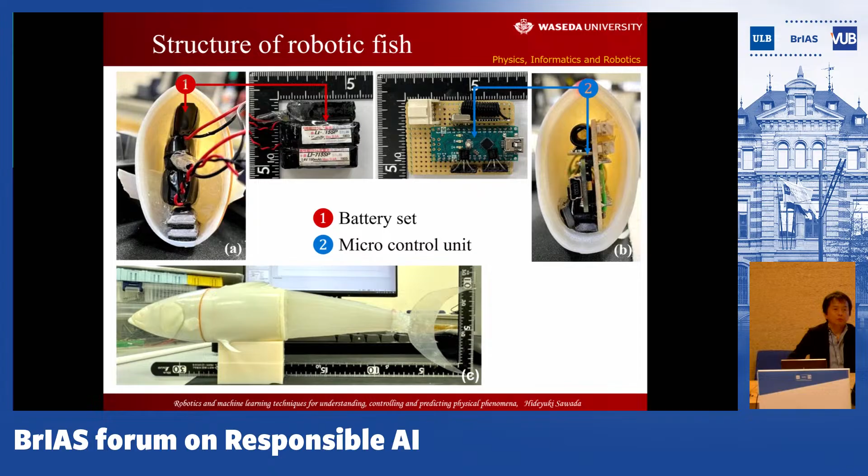It swings with different frequencies of the soft actuators, and the relation between the control command and the swimming performance is pretty uncertain. So what we tried to do is associate the control parameters with the generated swimming behavior by using a neural network. Then it was successful.

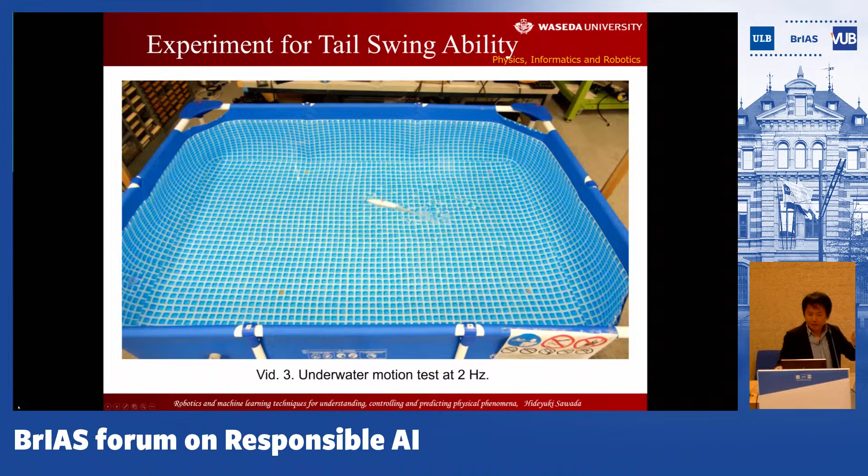Yes, the fish robot is untethered. Everything is packed into this robot, and it moves. It swings like this with a 2 Hertz flipping motion.

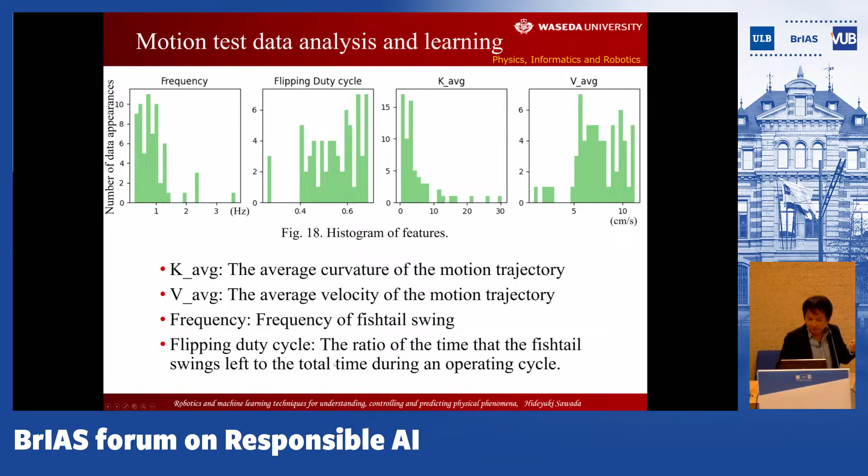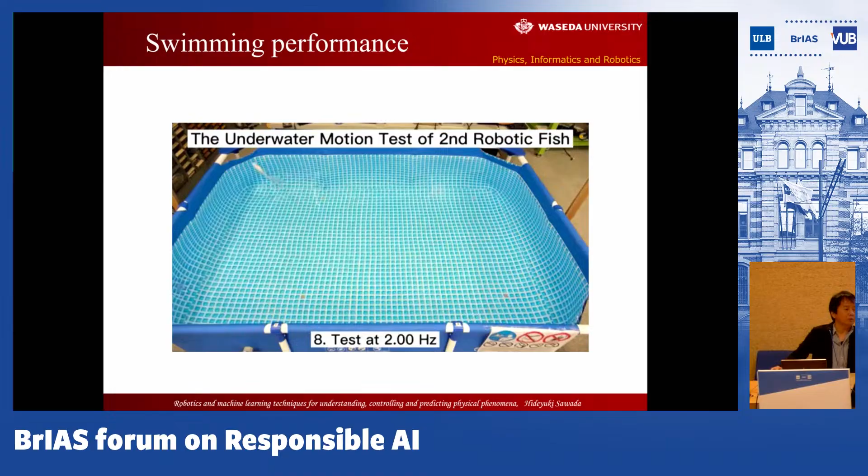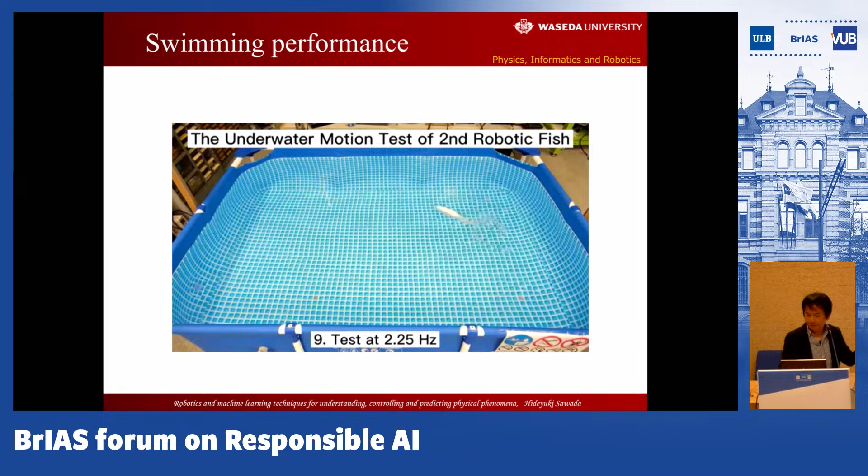This fish robot is able to swim with different flipping motions, and it can turn right and left by using the learned control parameters with the flipping motion. The robot is pretty realistic, right?

Continuum robot for flexible object grasping. We are also developing a long tail-like robot for grasping objects.

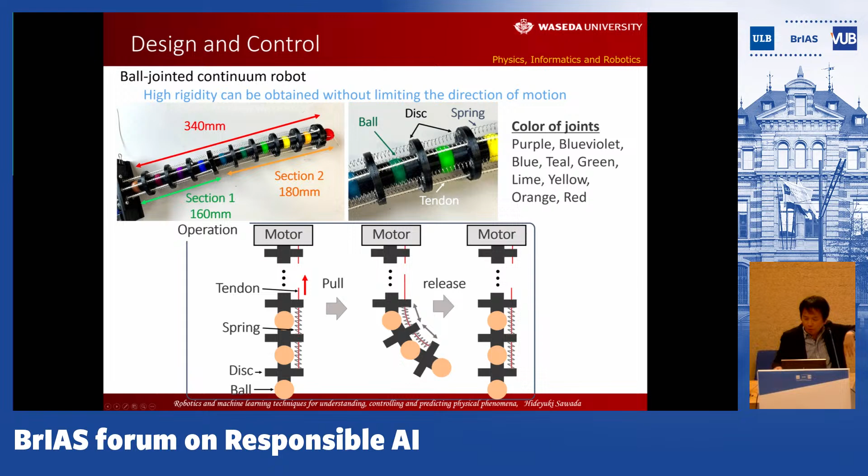We construct this flexible robot with a ball joint and springs and pulling actuators. Like this. Yes, it can move like this. It moves by pulling the tendons.

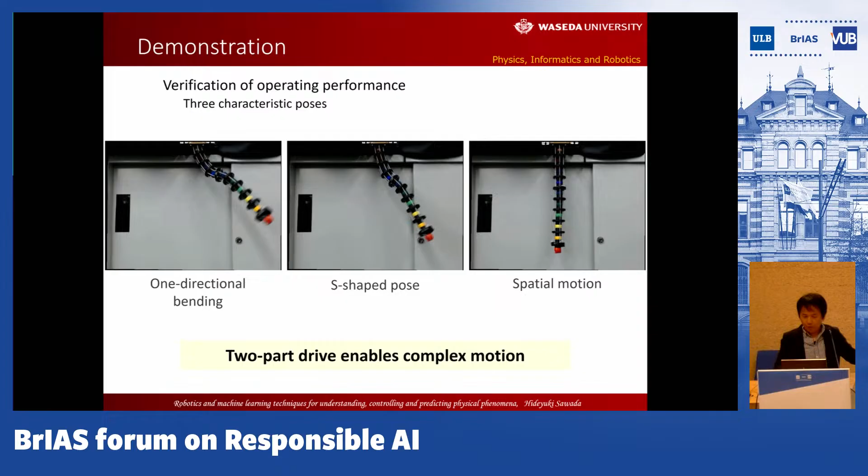But the problem is that when we like to put the tip of the robot in some location, there are different possible shapes of the robot, right? So we also apply a neural network for the learning of this flexible motion. Then it is able to grasp like this.

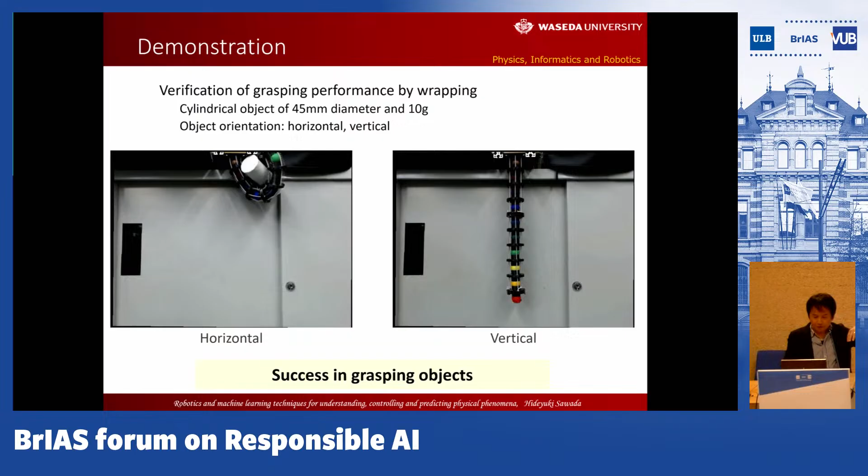Yes, with different styles of grasping, like this, all learned by machine learning. I have some other examples, but it's time to move on.

The conclusion is that I have introduced some mechanical or soft systems that grow up to learn like human behavior. That's all. Thank you very much. These are my research group with my students. Thank you very much.

So we have time for some questions. Thank you for the very nice presentation. I'm wondering, how do you explain this explainable AI for your fish and human robot? How are your explanation tools used in this control?

Explaining is, okay, in my laboratory we are also working to explain how it learns. One of the explaining methods is to use a feature map, a self-organizing feature map. We set the self-organizing feature map in between some layers. Then in the feature map, some relations of the patterns are mapped, so that close patterns are mapped near each other, and different patterns are located far from each other. By referring to the topological relation that has been automatically constructed in the map, we can see what relation the learning result has obtained.